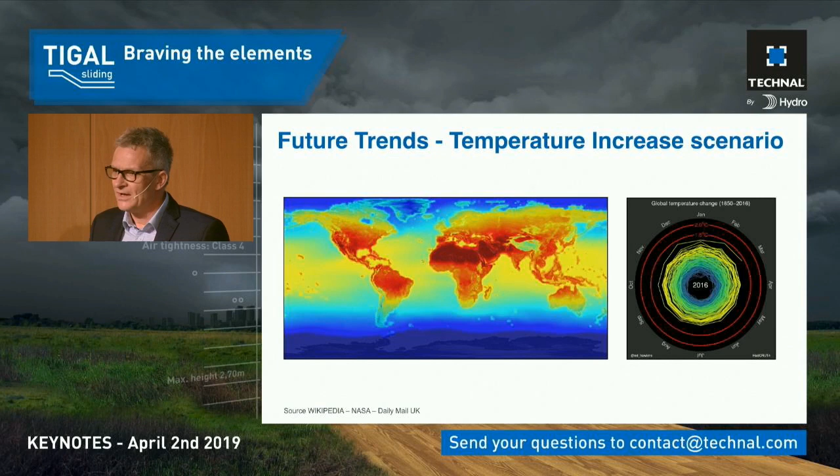Lucky for us, more than 90% of this heat is absorbed by the oceans around the globe. But here the next risk comes into play: an ocean that becomes hotter than 27 degrees Celsius develops many more hurricanes, typhoons, and rain, causing much more problems for people along the coastlines.

Then you have the water temperature increasing. On the left-hand side picture, every area on the ocean which is yellow will become during summertime hotter than 27 degrees Celsius. So in all these regions, you have an increased risk of typhoons, hurricanes, and whatever could happen.

The next question, of course, is you have the growth of population, taller buildings, you have the climate change. What happens? You see it immediately when you just look at all the hurricanes occurring these days already in the past years.

Around the coastlines, we will have the biggest issues on high wind loads and high rain requests. But it does not happen in Europe. I mean, in Barcelona, in Germany, we are safe. No problem on hurricanes. Why should we care for anything like that?

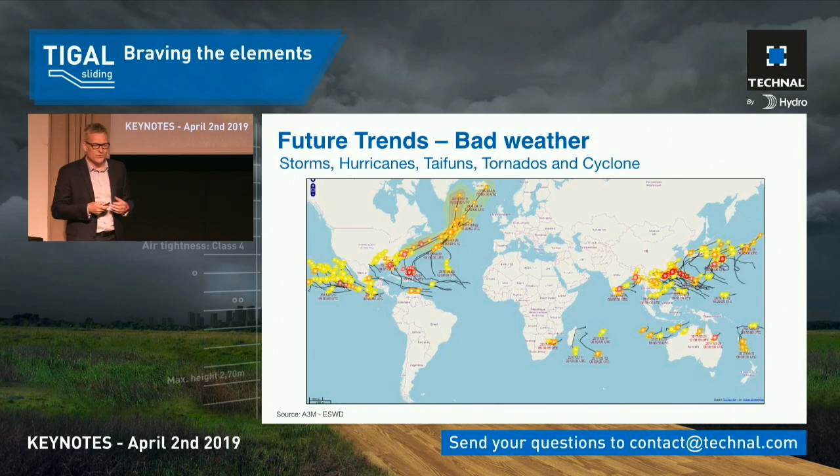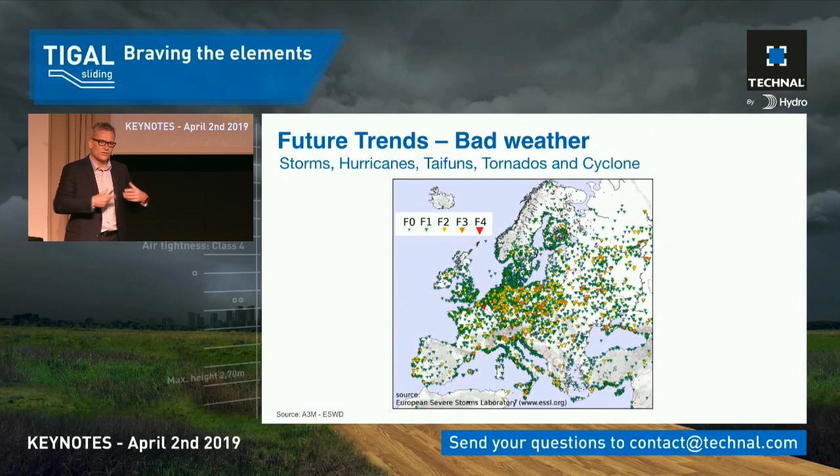So tornadoes also happen here. We also go high-rise, so we also have to take care with our constructions that the wind loads can be absorbed by having static, stable constructions in parallel. So being responsive to wind loads as well.

These are the macroclimate issues - climate change due to CO2 emissions. On the other side, every city is special. Barcelona is different than Paris, Paris is different than maybe Munich, and so on and so forth.

By having this natural evaporation possible, this really leads to something special. So also here, the urban planners are not only compressing the building plot, but they have also started to green the roads, to green along the rivers, but also to green the curtain walls. Balconies, terraces will be the outcome of that kind of future development.

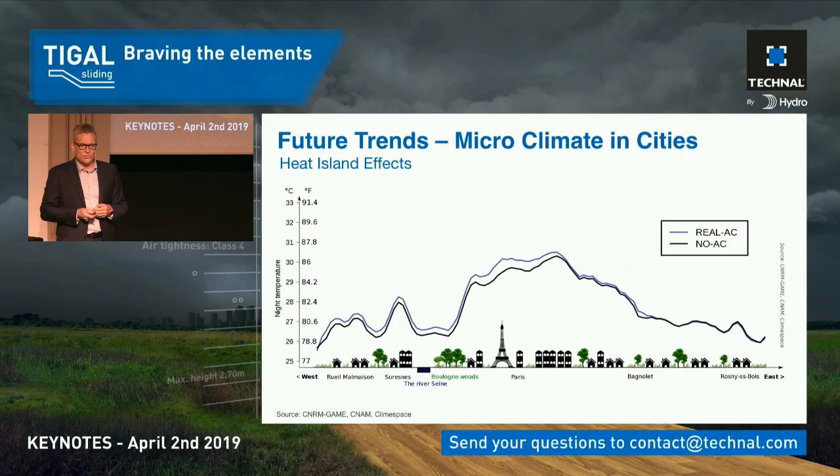So let's try to find out what TIGAL by TECHNAL can really deliver in that way of natural ventilation. And I'm happy for the colleagues in Singapore that Singapore has also made this kind of simulation - what could be done in Singapore to reduce temperatures during the summer period, during the winter period?

They have made a study: if I really green all the streets, if I green in addition my buildings, the temperature in Singapore could come down 2 degrees Celsius, cooling down the city climate, being much more livable in the city centers for the people living there, but also reducing demand for cooling, because it's 2 degrees less hot outside than without this kind of measures.

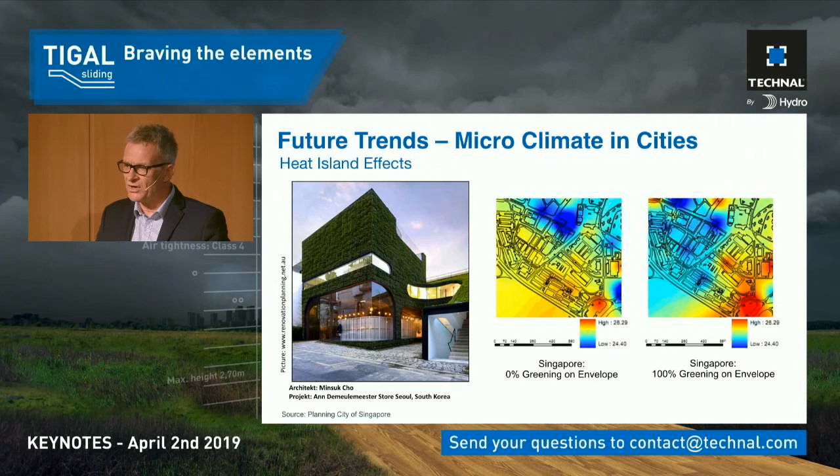So it's feasible, it's possible, but the microclimate, the greening is just one part. You have to get rid of residues, you have to get rid of fine dust particles coming from the traffic, from the truck traffic, from the heating devices. So ventilation of the city centers is a real issue.

The ventilation of city centers is a must, because having a free flow of air, not obstructed by coming high-rise buildings but allowing even more ventilation, gives much more advantages: getting rid of residues, cooling down the city during the evening, and enabling natural ventilation even for high-rise buildings. But this kind of free wind flow also means pressure fields at the curtain wall areas, which means a stiffer construction is needed to answer these requests during storms and hurricanes.

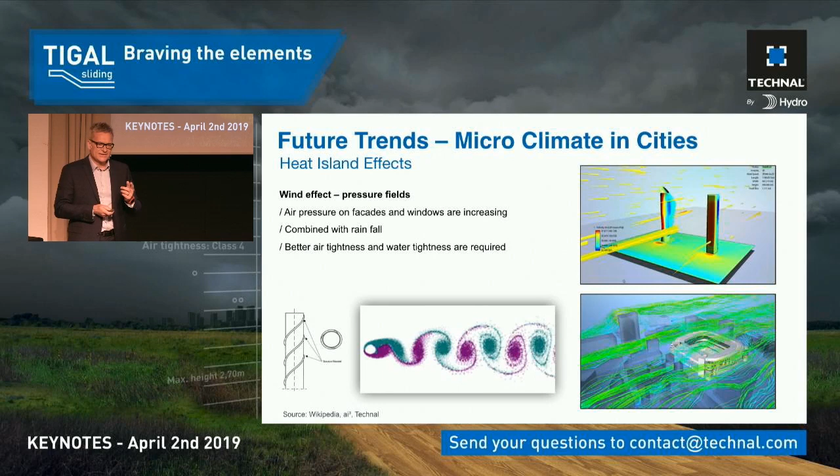The city of Vienna is a pretty good example of how they really did it. For 5 years now, Vienna has had a project ongoing where, in the main direction of the wind flows, they plant new trees and new greenery at the houses to cool down the city, clean the air from fine dust particles, and also enable free flow of wind.

Vienna is an old city, and its plot comes from medieval times. But when you look at the plot of Vienna, the streets follow only one direction - the main roads go parallel to the wind forces, the wind loads. The same building plot was done for Paris and other medieval towns. The old architects knew pretty well what to do to get rid of the heat of the city and also of residues.

This is something which is ongoing, and of course buildings can enable even higher ventilation and cooling by the right shape, by not obstructing the ventilation devices - as an example shows in Dubai on the right-hand side, with Koltay facades which could be used for the same purpose: to reduce residues and increase wind speeds.

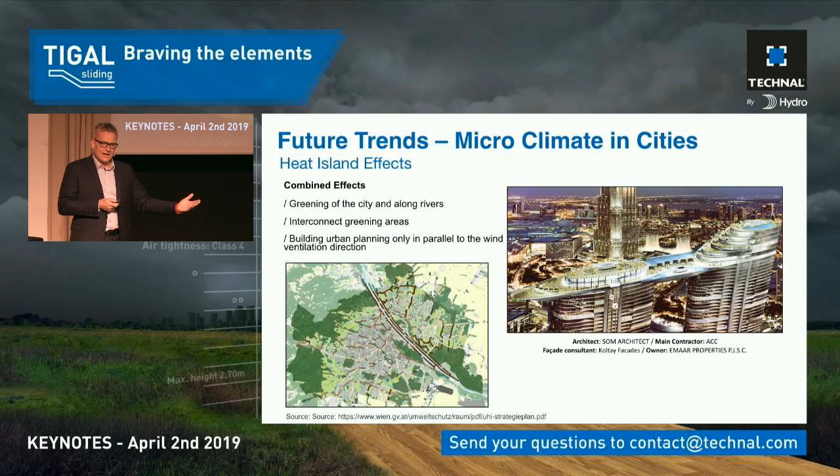When we have the microclimate, we have the wind speeds, and on the other side, of course, the devices which are heating up. Sun radiation could be for good and for bad in city centers - it also depends on the surface you have chosen.

When we have concave surfaces, the sun radiation is reflected straight into the city centers, heating up those areas by 10, 20 degrees - in some areas, like London, we have seen a project more than 50 degrees. So you have to take care about the reflectivity, the materiality of the surface, and also the shape of your solution.

On the other side, convex solutions radiate and diffuse the sun radiation in all directions, reducing the overheating of city centers. In addition, if the choice of material also enables less heat absorption, it will definitely reduce overheating and microclimate issues.

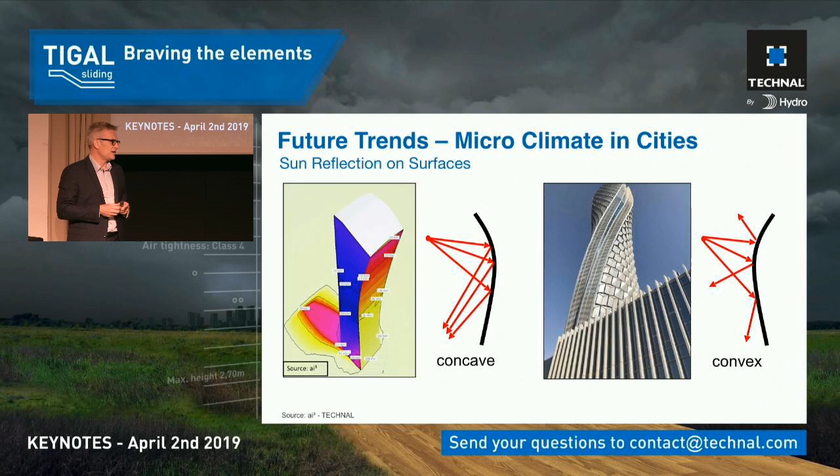What is correct for daylight is also correct for sound. When we have a sound issue in city centers, it is mainly enhanced and increased when we have high-rise buildings. In the street canyons of today, we have hard surfaces, glass surfaces, and the sound in between is reflected multiple times. By this, the increase of sound in city centers is more than 3 dB. What is 3 dB? The difference between 1 car passing your building or 2 cars passing your building.

So this is something we also have to reflect on - we have an increase of sound. We have to take care, with TIGAL by TECHNAL, that when it's closed it protects the people inside against sound from outside. This is definitely important.

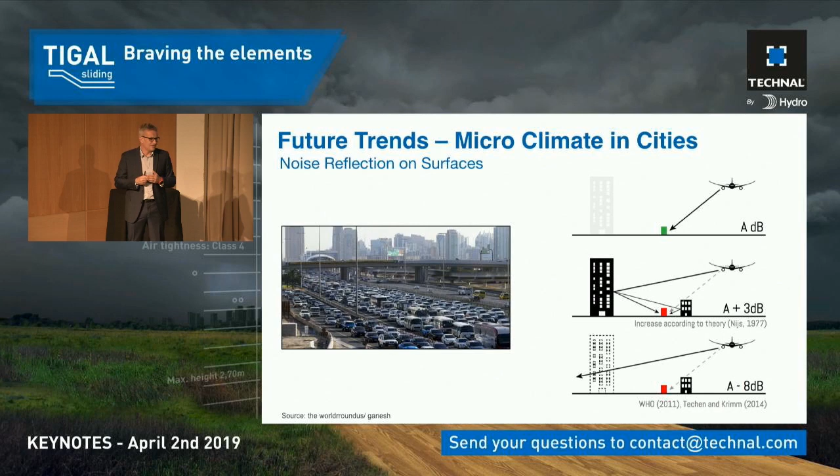For architects and urban planners, something more could come into the scene, as you see in the lower right bottom area. If you make the surface of a building in a way that absorbs sound, diffusely reflecting it, you can lower the sound in city centers by 8 to 10 dB, which means the impression for you as a person is as if the sound is just half compared to beforehand. How do you achieve this? Of course, by convex solutions, but making projections with balconies and terraces has the same effect.

So this kind of shape of the building influences not only the overheating in the microclimate but also the sound experience in city centers. This is a really, really good chance and challenge for architects to design something like that in the future. What will the future buildings look like? Will they be office buildings? Will they be just residential buildings?

Will it be a mixed use? We think it will be, because what we plan today as residential could become an office tomorrow, and the day after a grocery store might enter. So whatever we do with our construction, we must be flexible, adaptable to society and to the development of the renting plot. This is something we really want to see.

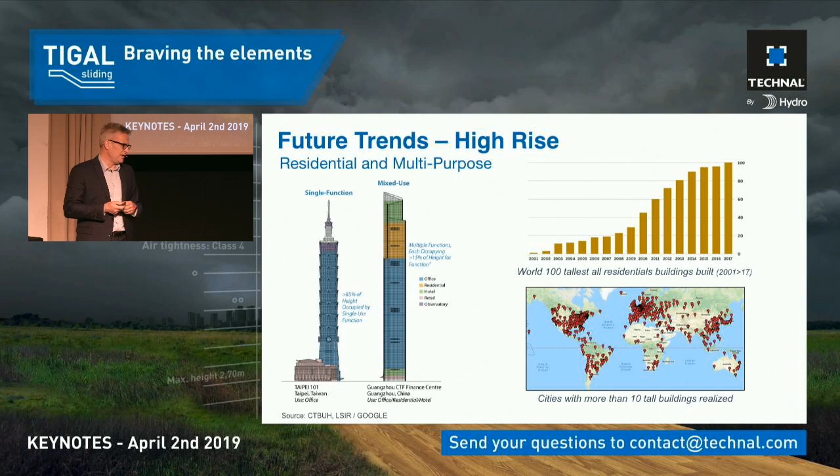To summarize, buildings get taller, but with taller buildings we get more opportunities as architects and planners because the surface of the envelope increases. We can harvest energy. We can clean the air. We can absorb the sound. We can bring daylight into the buildings. We can allow natural ventilation into the buildings, reducing air conditioning needs. All this is feasible, and with new solutions we have to answer this kind of demands and requests.

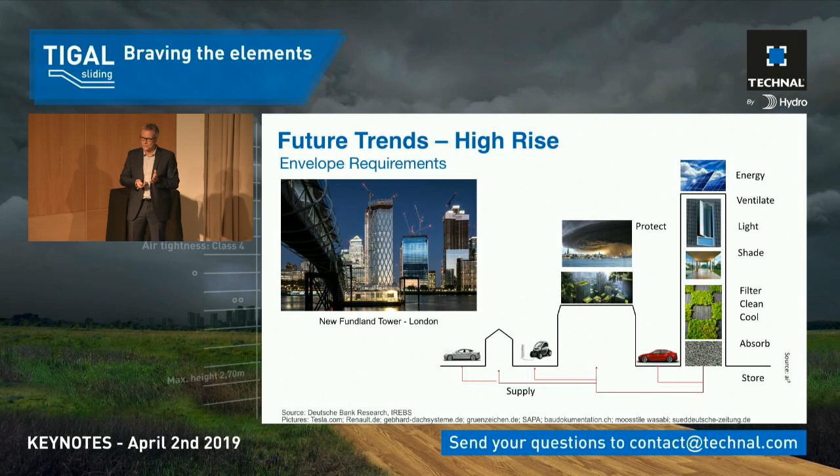The next question we are raising, when it comes to the design brief and the buildings, is how will they really be in the future? There's a pretty nice project in Copenhagen planned by the architects. Their idea is to be so flexible that it doesn't matter whether it's residential, office, or a grocery store area. Everything should be possible at the same time by using the same design, the same outer curtain wall. Why do I say that?

When you have the opening and closing of a device, you must test it. In residential, you normally test 10,000 opening and closing cycles. For commercial, you test 20,000 cycles. At TECHNAL, we did 25,000 opening and closing cycles with the best performing solution. So we did even more, just to enable it to be used wherever you build it, whether residential, commercial, or a grocery store. Regardless of the use, you can use it like that.

In addition, this concept for the architects in Copenhagen is pretty interesting because they want to use 40% recycled concrete. They don't want to pour fresh concrete; they want to use old concrete, redo it again, and put it into the construction as well. So think about recyclability.

Reuse of material is something very important to us. In TIGAL, for instance, 70% of all the materials are recyclable. And due to the cradle-to-cradle certification, we removed all PVC content in our structure.

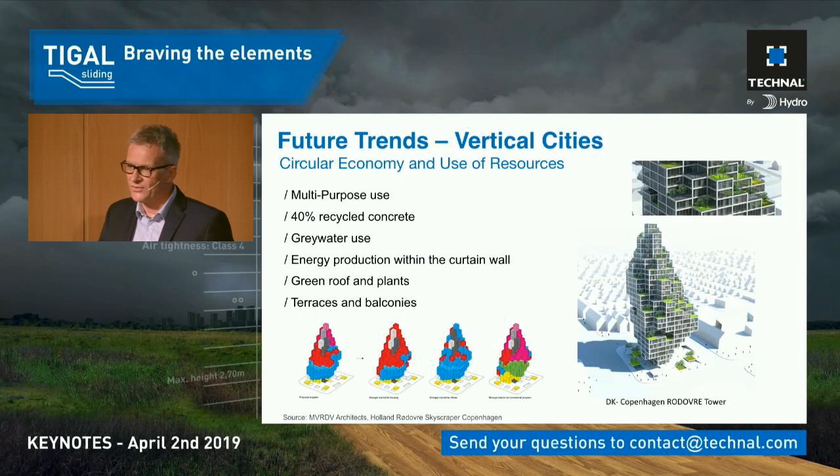We also took this plot from the architects. What they in addition do, of course, is produce energy on site. They become autonomous with the energy demand. They take care of the gray water consumption. They also want to have terraces, but also rooftops greened to reduce temperatures in city centers, while allowing more comfort for the people inside.

So the concept is not a single one in Copenhagen. You see a lot of projects around the globe exactly with the same plot, with the same principle of idea, taking care of the nature, taking care of the use of what you already can harvest on site as well.

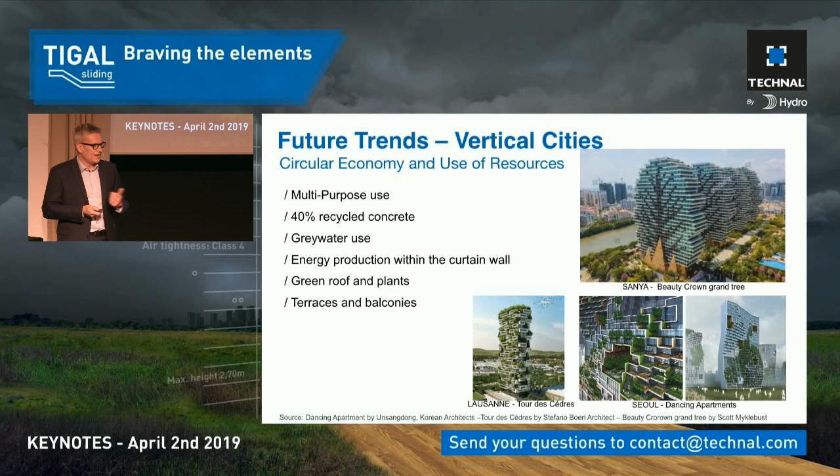In this context, I'd like to remind all of us, in Europe in 2020, next year, there is a forecast, a request from the European Union that 50% of all our waste has to be taken back and recycled, making something new out of it. Right now we have an average of around 39% overall Europe, where areas like Germany and Austria are more than 60%, and others close to 60%.

Even more important for all of us in most of our countries is, what about the jobs? In 7 years, in this area, to treat waste in a proper way, the jobs have increased more than 40%. So it will become also a kind of job machine in the future to think about recycling, to think about the use of urban mining.

Urban mining, a pretty important thing. Today, already 200,000 tons of aluminium are installed in buildings worldwide. 200,000 tons of aluminium installed 40 years ago, 30 years ago, these tons are now coming back.

So it would be the best thing to reuse old windows, recycle it, and bring new windows into the market. We have a solution to that also for TIGAL. I will show you a little bit later.

To summarize what we need for the TIGAL launch, but also for the design brief, in short: it has to be resistant to heavy rain. It has to be resistant to heavy storm and wind loads. It has to answer the question, how do we keep the heat outside? How do we keep the cold outside to save energy at the inside? Also, we have to take care about smog, dust, fine particles in the air of cities. So a very tight construction is a must for all of us.

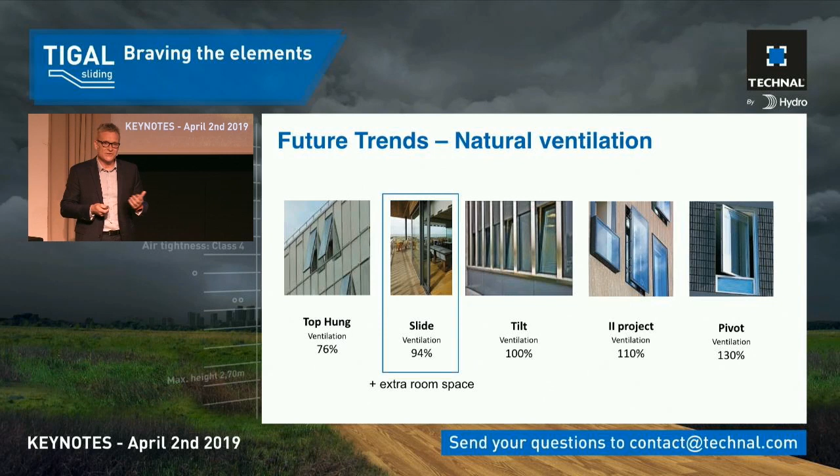And for the ventilation, of course, a slider also has some advantages compared to the top-hung open-out solution. So the best compromise for the design brief was to go for a kind of sliding solution with the performances of a window, allowing maximum natural ventilation, but having the tightness of a window construction as well. So we went into this kind of design brief. Let's have the first glance, the first look, at TIGAL by TECHNAL now.

We have scheme A already developed. It is one fixed area, one movable part. And what's pretty interesting here is, normally you have a slider - a lift and slide, just a slide. Here it's projecting in parallel to the inside, and then you can slide.

This allows you to have no gaskets in the opening position at the frame any longer, so it's extremely easy to move the sash without too much force. And in addition, by having the construction like a window, it is as tight as a window - it is 4 times more tight than a slider construction.

This was part of the design brief we have made, and I guess this example shows you the first glimpse of the product we want to show you later.

In addition, when we see braving the elements even further, let's go into the technical details. I'm a German engineer, so I have always to come back to this one - standards, we love standards in Germany. So we have a classification on water tightness E1200. I mean, it doesn't mean anything to most of us - what is 1200? It's 1200 Pascal.

It means the wind pressure is 120 kilogram per square meter - this is pressure of more than an F1 tornado. Furthermore, we have used 2 liters per square meter water per minute to test the water tightness. And as I said beforehand, it is 4 times more watertight than an ordinary slider construction.

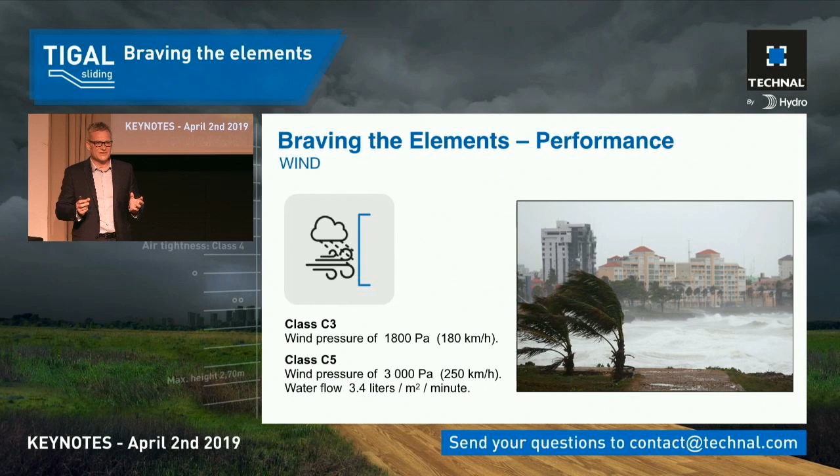Those who are not only in the European standards will realize immediately 3.4 liters per minute and square meter is the ASTM standard. So our aim is, of course, to have an international appearance of this solution, being tight in all of our applications worldwide. Very important for all of us to have this kind of opportunity delivered.

The next one is, of course, when we want to go to city centers, it is traffic, it is sound outside. The sound insulation with 45 dB is as good as an ordinary turn and tilt window - 45, and if you go for the traffic rated, it's still 40 dB.

Which means when you live in a city center and you have a lot of traffic outside, you close the door, you close the window slider, and you hear almost nothing from the outside. So it's easy to live and easy to sleep with a lot of comfort inside.

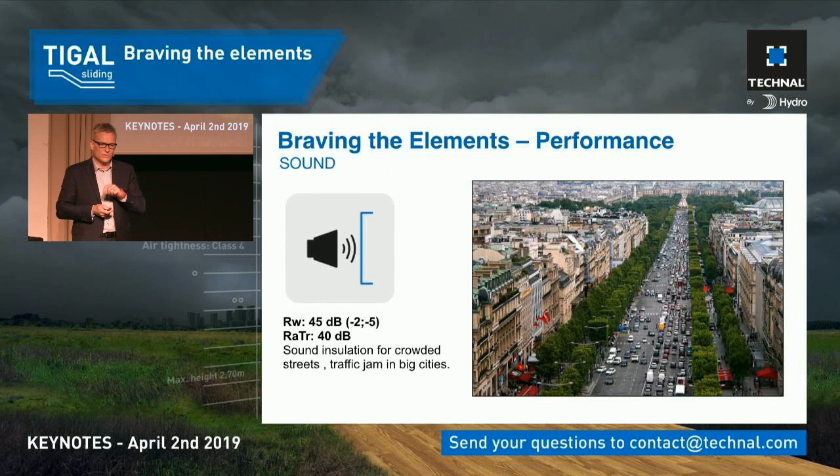The next challenge we have faced is how do we cope with the increase of temperature around the globe and the cooling demands. The construction we have chosen ranges from non-insulated all the way to the passive house solution. So you can even go straight to passive house requirements with this new window slider, TIGAL by TECHNAL, answering the overheating, heat increase, but also more weather extremes during the winter period.

And let's share together a pretty good video showing a little bit the details of the slider construction, to give us more insight about the technical engineering done by the colleagues in Toulouse, making that happen during the quest over the last 3 years, with a lot of ups, not too many other things, but a lot of learnings on that.

That was wrong from my side. I'll come back once more.

You see it's scheme A, so you have a fixed field and an opening field. Everything marked in red running around the sash are locking points. We have 4-sided locking points around the slider, connected with the sliding rods, which are made here in green. And really important is the bluish part.

It's a patented bulkhead solution, which closes off the area where water is penetrating and where it should be tight. This is a pretty interesting part of it. Please remember the shape of the hook, I will come back to this a little bit later.

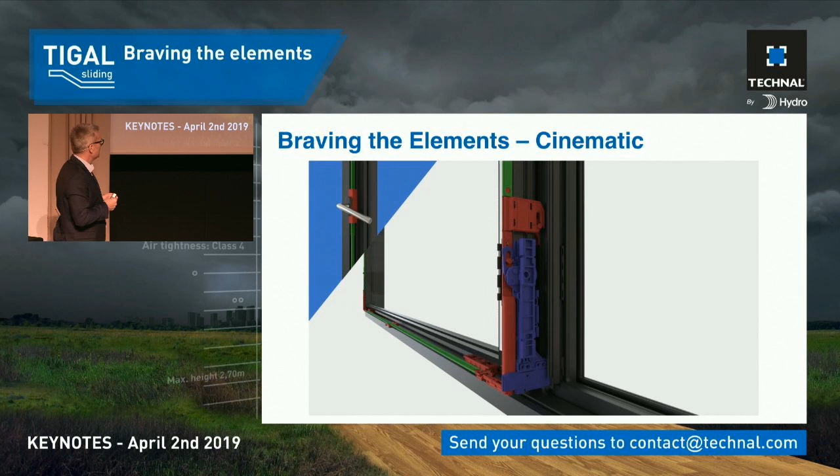The hooking device gives us the opportunity to have microventilation, but in addition also complete parallel moving away from the structure. We can swallow up to 300 kg, 2 meters times 2.7 meters. But now let's listen to the sound.

This sound is a simulated sound. Outside you have 75 to 80 dB sound, and this is the real performance of the slider we have measured in our test chambers. This is the experience you will have if you install the TIGAL by TECHNAL into your buildings, into your project plots. The next one is the acoustics.

As said, 45 dB is a must, but even more important is acoustics in combination with the possibility to reduce air conditioning, meaning ventilation purposes. When you have a slider today, you open it and you have a small gap. According to the gap, you get more and more air in, but unfortunately you might also get people in you don't want to have.

With this solution, we have microventilation. When you put the handle at 90 degrees position, the complete frame moves parallel to the inside 5 to 6 millimeters. So we have a gap running around the sash, allowing ventilation. In this position, a room gets completely refreshed with new air every 2 hours.

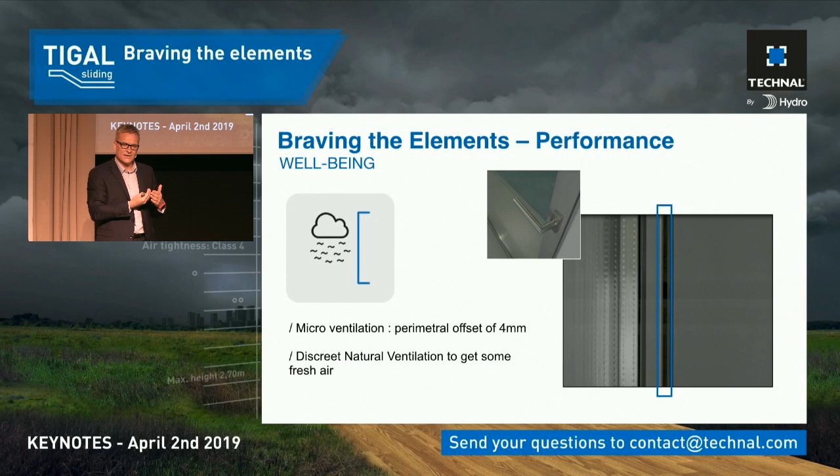This is something remarkable and new, that in the secure position you have ventilation possibilities. This is something you should really consider to lower the climatic loads inside the building, reducing the air conditioning needs and helping Paris to get cooler during summer periods, for instance.

When it comes to security, we have already done the RC2 testing. RC2 means a professional burglar tries for 3 minutes to enter. The professional burglars have not been successful because we have reached the RC2 classification.

Then we have to consider, you remember the first pages I'm sure, 1 person out of 5 in 2050 will be older than 60. 500 million people will be older than 80. So easy access is a must for all the designs. The TIGAL by TECHNAL has a minimalistic threshold of just 15 millimeters, allowing easy access without stumbling going to the inside.

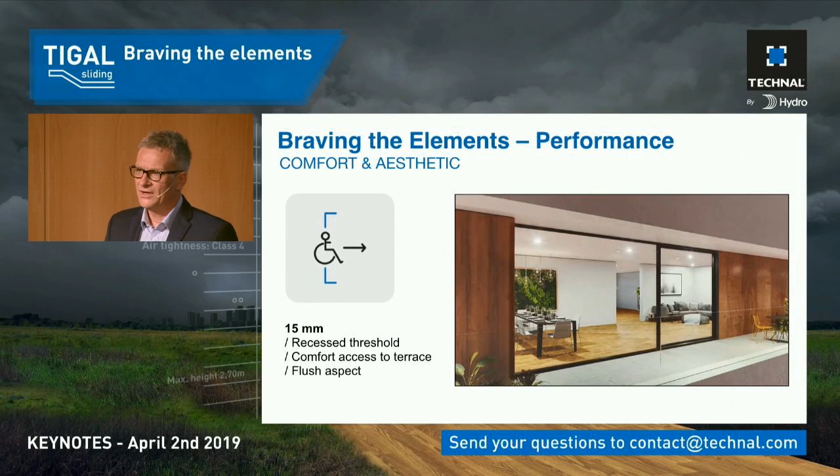To summarize a little bit, we try to do a little bit more than just good design. We want to be as sleek in the design as possible, as minimalistic on the frame as possible, as transparent as we could even reach.

You have a choice between visible and concealed sash. You have the choice between visible and concealed drainage, but you have in addition a complete concealed fitting solution, which is also something giving more aesthetics to the architecture of the building from the outside and from the inside.

To summarize briefly in a cross-section, the complete depth of TIGAL by TECHNAL is 150 millimeters. The infill thickness maximum is 53 millimeters, and the sash has 71 millimeters. In addition, we have thought about the concealed, completely invisible mechanism in between, but also we have the choice with and without connecting to the structure profiles.

We call it BTC grooves, and this is something we are not only designing in TECHNAL as a solution, we are also designing a proper installation phase. This is our aim, and of course you have opportunities for the hidden and the visible drainage, and we have a lot of space to the outside.

Just imagine what you want to do there. You can put in balustrades, glass balconies, LED lights for instance, for having a media facade during the nighttime, or you put in fly screens. So there's a lot of opportunities to be more creative in coming projects than we have thought so far.

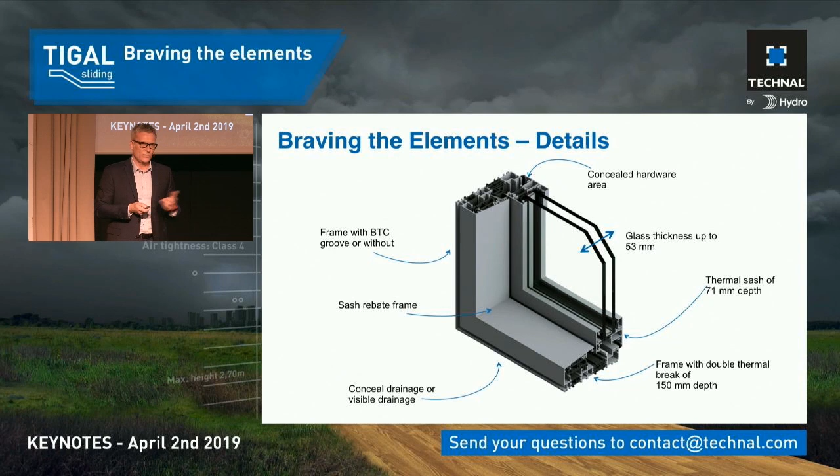As I said, you have the hidden and the visible sash. The hidden sash gives you the opportunity to increase the transparency up to 98%.

So only the middle mullion will stay visible for the architecture, for the users at the inside. And in addition, this kind of concealed sash has one more technical advantage. It is hiding completely the outer area of the sash, reducing the bimetal effect, so it's even easier to operate that slider during the summer periods.

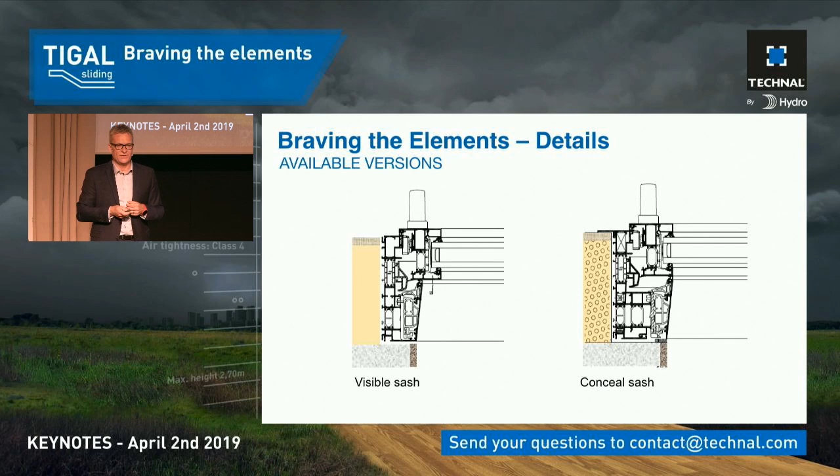It's also a request coming out of the design brief. You have it in non-insulated and insulated because it's a product for around the globe where you have different conditions, different requests, but no hassle. If you have done it once, the other one is exactly the same. We are using the same articles, the same fabrication procedures, the same installation procedures. Everything is exactly the same.

So you can have two options, thermally broken, non-thermally broken. And just remind yourself, you can go in the thermally broken down to passive house level.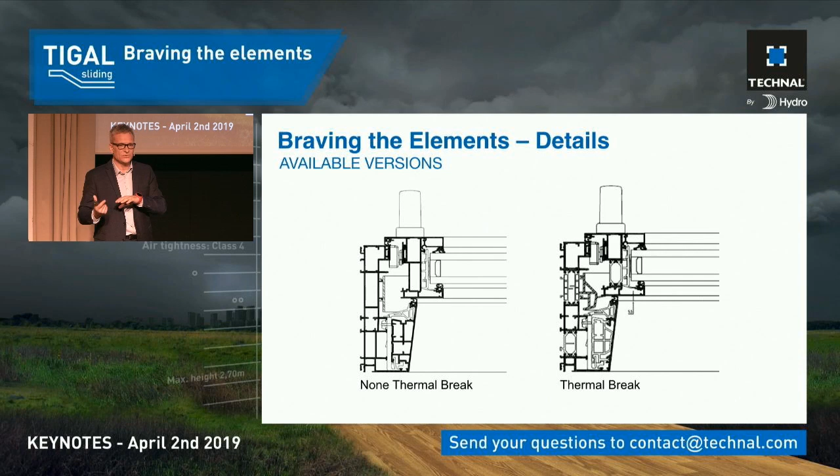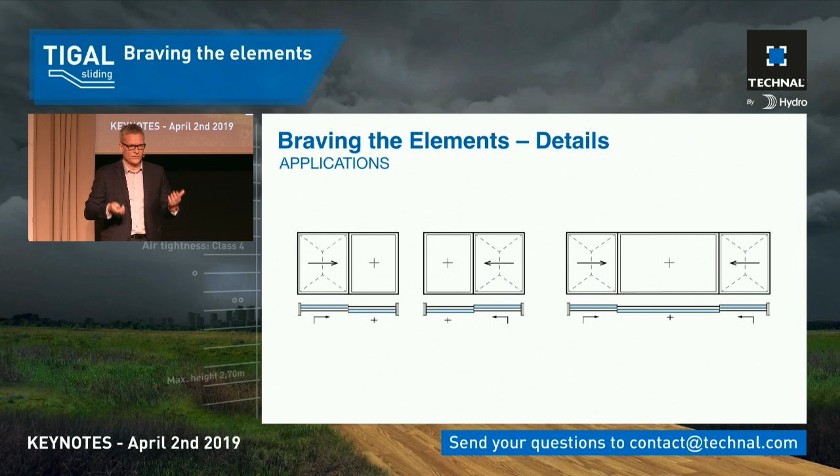You should really make the test by yourself. It is easy to move. It is without any hassle. Anyone can open it, and remind yourself what kind of forces you might use today with the slider construction and the beam metal. Here it is just possible with a finger.

This is TIGAL when it comes to the genes, when it comes to the design details, when it comes to how to answer the brief - we have tried to forecast this in the past 3 years. But then also a heritage from the Hydro organization showed us the way.

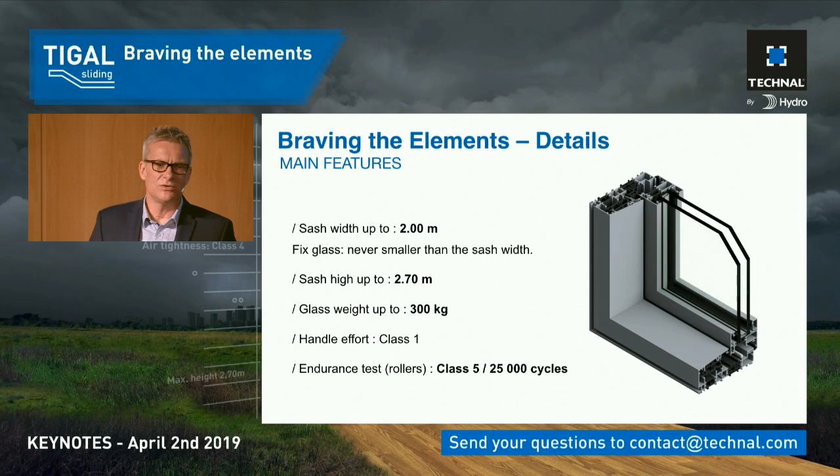You mentioned 2020, Hydro wants to become CO2 neutral. This we reach with a TIGAL solution with 2 options. Today, if you buy an aluminum window, 1 kilogram of aluminum causes 9 kilogram of CO2 emissions. If the production of aluminum is even used in coal-fired areas, it goes up to 20 kilogram of CO2 emissions.

We have 2 new materials into TIGAL by TECHNAL. We use a 4.0, which is a primary aluminum, made almost 100% water-powered in Norway, reducing from 9 kilogram to 4 kilogram of CO2 emissions. And we have another one which takes care of the circular economy of urban mining, which is 2.0, a complete recycled metal. This metal has already been a window 40 years ago, and it's called infinite aluminium, and it has an average of just 2 kilograms of CO2 emissions.

What is 2 kilograms? What is 9 kilograms? What is 20? When you have a curtain wall roughly around 10,000 square meters, you have approximately 100 tons of aluminum in there. So it's the choice of the planner.

Coal-fired, it is 2,000 tons of CO2 emissions. In this case, infinite aluminium, it is 200 tons of CO2 emissions.

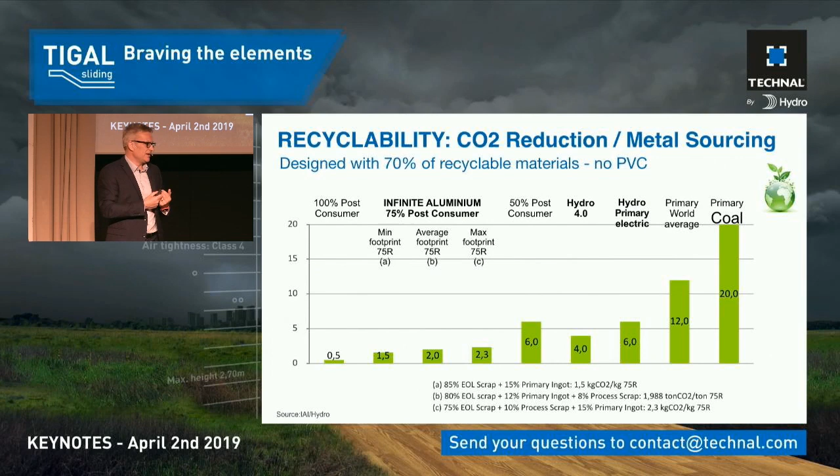To become more aware as a society, to become more aware of the climate changes. Minimizing CO2 emission is a must for us in Hydro and especially for us in TECHNAL. And TIGAL by TECHNAL is the first solution. We really want to go into this CO2 reduced aluminium materiality, and you'll see a presentation later on just on that topic.

It was a pleasure and honor to me to give you a little bit of background information about the thinking of the engineers, about the design brief, and everything which tried to influence us to make a proper solution of a window slider which takes the comfort of a slider construction and combines it with the performances of a window solution for the best in city centers.